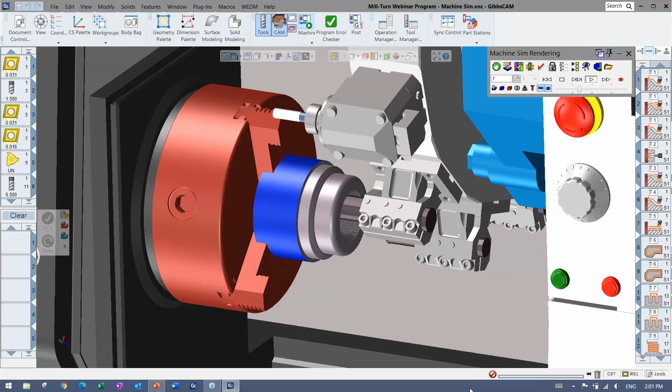I'm going to get right over to Gibbs here, and I have the part that I'm going to be demonstrating here, and you can see kind of the full setup where I have a whole machine sim, the machine's in there, fixturing, there's tool blocks, all of the tools are well defined. The purpose of this webinar is just to show off how very smooth and simple it is to go between milling and turning when you're using a machine like this that has obviously turning, but also live tooling in most situations. And in some situations, it can get even crazier than that with milling heads and lathes and stuff.

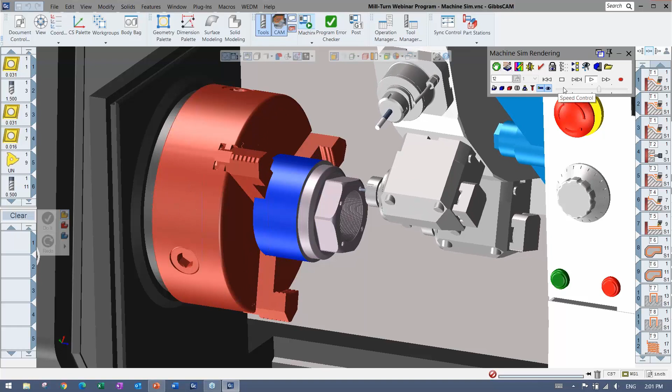So we're going to focus in on a single turret and a single spindle. And I'm going to walk through and just highlight all of the little things. I'm not going to go too much into training mode here. I just want to get the point across of how it can be used, and we can go from there. Right, so the simulation itself, I'm not going to have that in the file right away, but you can get an idea here where it's really ops on the face, the OD, anything that you would expect to see.

All right, so I'm going to open up a file. I do have files that I'm going to be loading just to keep things smooth and running on time here. So the file really doesn't have anything done to it other than I've selected the machine quickly, I've put in the stock and clearances. I've even brought in a fixture here just to show you that you can do that. Bring in a model, download it, whichever, very easy to use. And you can hide it, doesn't have to be shown at all.

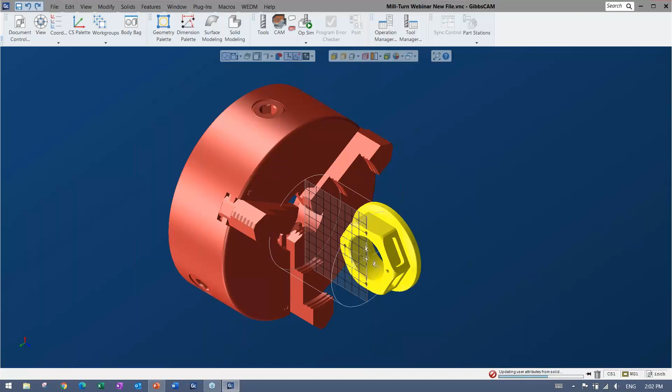All right. And I'm going to bring in a part as well. And the part, when you're cutting something, it can be a model like I'm going to bring in. So I'm just going to import my part in here, and you'll see a solid representation of it. But you can import wireframe geometry, you can draw wireframe geometry, you can dimension, modeling, all that can be done in GibbsCAM. So wherever you end up starting, you'll have something to cut in the end and to apply the actual tool paths to. Right, so you can see here everything's nicely defined.

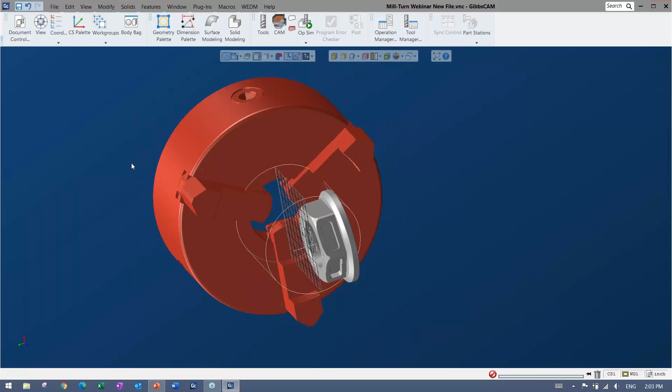Now once you have your part in here, there's lots of very good display preferences. You can hide things, show things, colors. Really the whole interface is very customizable. Anything can be moved. So I'm using the default layout. But just know that as I go through, you can change it and add shortcuts and all of that good stuff.

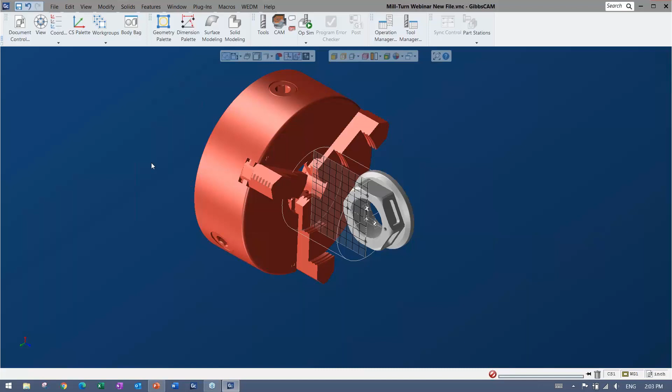Moving things around is also very simple. There's a view palette that you can use. I prefer to use shortcuts and my mouse or a space mouse. They're all available. They can all be customized so that it's the same as other softwares too, which I find is very important when you're switching between them. Okay. So first thing I'm going to do is I have this chuck here, and I'm just going to send it to this thing called the body bag. So that's a little manager for the solids, and there's different levels as well that I'll get to when I'm engraving something. All right, so all the good stuff is there, and it's very easy to access here, even on the default layout.

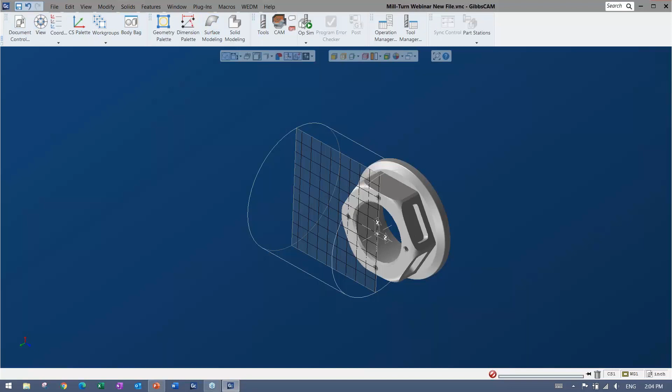Now, you can see my part didn't quite come in the proper way here, and there are plenty of tools to move things around, to locate your part, rotating, translating, all the good stuff, and some little shortcuts too. So this does come up for me, depending on how the CAD modeler has modeled things. It could possibly come in the wrong way, and I'm just going to go in and bring up the CS Palette. So these are coordinate systems, and you'll see them come up again. But basically just a machining plane, and I can go ahead and align this part to that plane. And it just takes some of the angle out of it.

Even if it was a severe angle, you could do a multiple lineup and line up to one plane and then the other, and then be ready to go and machine your part. So I'm happy with this. It looks like it's in the right orientation. There are plenty of tools to check it, but I know I'm good, so I'm going to go ahead with that.

Now, I want to cut, so I have something to cut. Now I need something to cut with. So that's when it comes into the tools. I find the workflow with Gibbs is very, very easy to understand. It doesn't really change whether you're doing turning or milling.

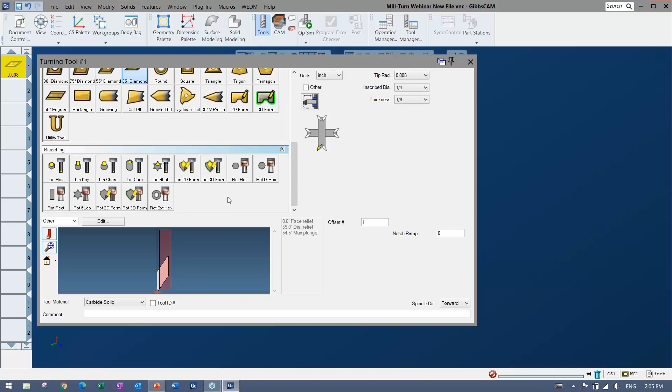You can see here that when I make a tool, first thing you do is you pick a tool form. You can see in these cases we have some milling tools here, so that would be live tooling in our situation. We have our turning tools, and we even have some broaching, some linear and some rotary broaching in there. And all of these do have a form tool equivalent, as well as the tool holders.

So you can draw, you can import a wireframe or a model and apply that as your tool shape as well. All right, once you pick something, you fill in the size, fill in the holder information, and then you give your offsets, can give a little comment, and every tool is like that. So if you're making a tool from scratch, it's very simple. It's easy to find your way around.

Now, as you get into programming, the better thing would probably be to have some way to bring in tools. So I'm going to be doing that coming up. So you can definitely load tools and all that good stuff as well. All right. Let me just pick maybe a standard insert here. Tool holder on it there. And you can see the preview is all nice and 3D as well. Boring bar.

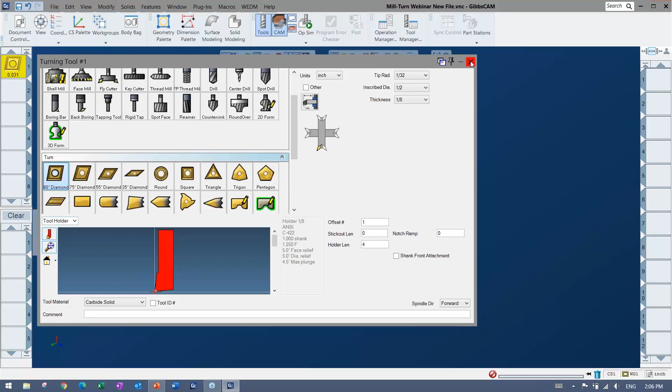So once you have a tool, whether it's a milling tool or a lathe tool, you bring it down to what's called the process list. And this is really where everything gets added together and set up before you actually make it into a toolpath. Now, depending on your license, you may or may not have everything that you see on my screen.

But this is how it works, where you either drop your tool down in here and you get access to the process types, or you can go it the other way around and double click here, select a process type, and it will filter through all the tools it thinks you can use, and you pick it, and then it all gets there in the end to a dialog that would set up whatever your toolpath process type is. All right, so whether I'm doing a contour here or roughing, threading, there's elliptical contours. I mean, there's a process for pretty much everything.

So we're going to stick to certain ones here, but if you don't see the ones that you wanted to see, then obviously you can put in a question or ask your local reseller. Now those as well are loadable. So you know, the best way to do it, I mean, you have to make your tool most likely at some point, but I actually have my tools and my processes created, again, to keep things smooth and keep things under the time limit. So you can load tools here, and there's tools that you can save yourself.

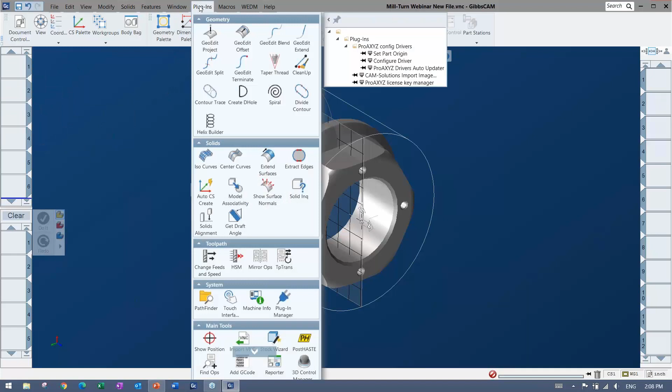You can also use different plugins, like Sandvik has CoroPlus. There's also the Helical Solutions and the Harvey Tool libraries here, and some other solutions for that as well out there. So in that case, maybe I have a process already set. You can see here I've created a folder, and it's just Mill-Turn webinar, but I'm going to go ahead and load out of that. But you can make your own folder system by machine, by material, by tool type, whatever you'd like.

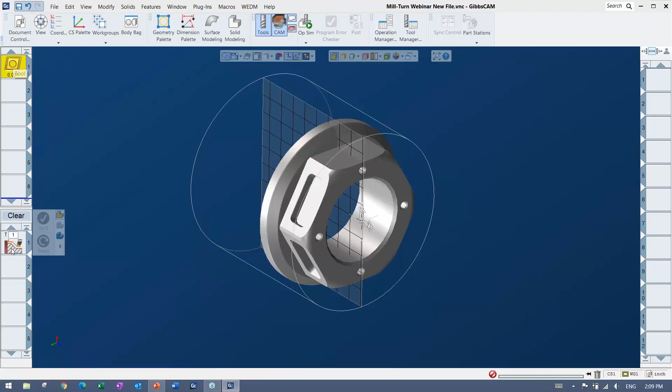And when you load it in there, then you can see if I load a tool, I get the tool. And if I load a process, I get the tool along with all of my parameters filled out already. So that could be anything from feeds and speeds to what type of process or what type of cut you want to do, right? So the one that I've imported here is the facing process. All right, so we're going to put that onto our model.

And again, the workflow is always the same. You'll see as I go through: make tool, drop tool down, pick what tool does. You get a dialog. Everything's all in that dialog. There's no hunting around trying to find different things. And once things are filled out, then you can apply the actual toolpath to the part.

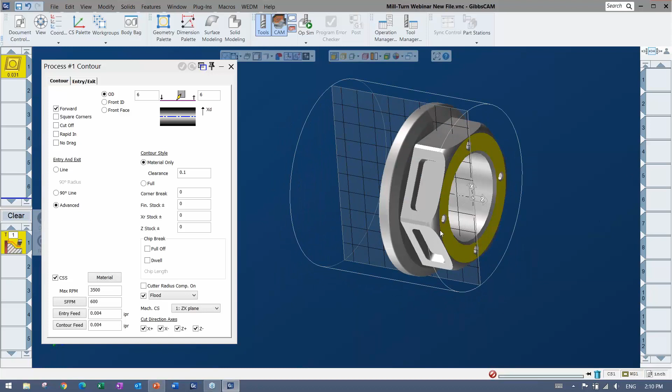So that's the place I am at right now, and depending on what process you use, there's different things to select. So I could be maybe selecting the model, or I could be selecting some wireframe geometry. I may extract some geometry from the model. If it's already drawn, I can use that. In this case, I'm going to bring up something that's used to turn on solids.

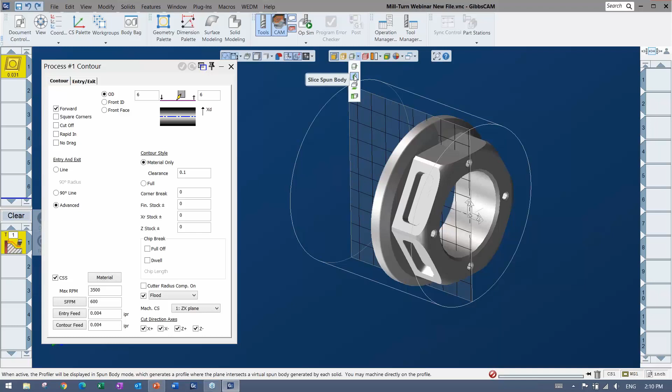That's very useful, actually. It's called the profiler, or the slice plane. And it has a certain mode. So if you see the slice plane just as it is, you can see that it slices through. And it's not really what I want to use to turn this part, because if I turn this guy, then obviously it's going to gouge in the higher areas. So what I'm going to use is I'm going to turn it to slice spun body mode.

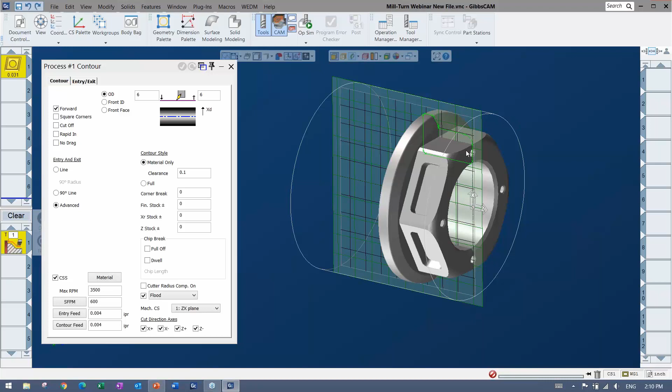And that one's really great because you can never bring that slice plane off zero, off the center, so you know your diameters are right. You can also see that it's showing all of the highest points. So it's showing all of those and getting rid of anything that you can't hit while it's turning, while the part's spinning, like these holes are not being sliced anymore.

And you can extract geometry off of that, or you can just go right in and use the profiler. All right, so that's going to be what I'm going to pick for this specific toolpath. So a contour or roughing, anything with a specific shape is usually going to need some kind of a profile like this or a model.

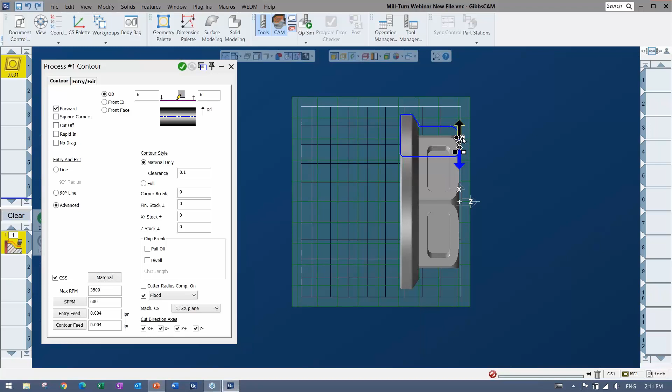Now when I'm applying, in this case, our lathe processes use these start and end markers that are quite easy to use, really. That's just about where you want to start and where you want to end and what direction you want to go. And then whether you want to go all the way around or one skim on the face, let's say, like this.

I'm ready to do the toolpath right now, but I will mention that you can move these by specific amounts and all that. You might see that come up. I'm just going to kind of place things where they are and rely on this material only to prevent any air cutting. All right, even though I drag this up here, when I do the toolpath, you'll see it avoids that.

Now, once I'm ready to make the operation, finished operation, notice my list over here, which is the operation list, is empty. So I'm going to go in, I'm either going to say do it, or anywhere I right click, there's a do it. All right, and if I click that, you can see the toolpath appears, and I have my finished operation over on the side.

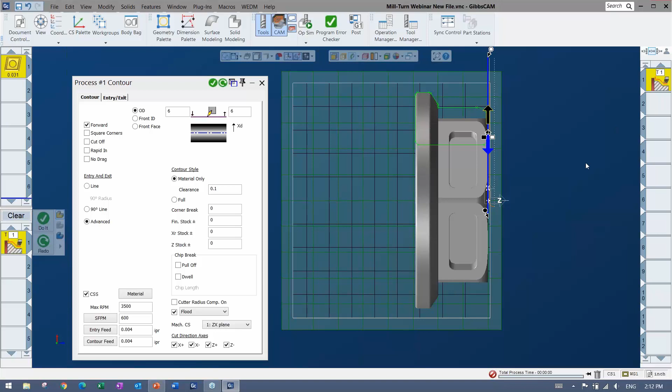Now, if I wanted to change something about this, then that's when redo comes up. Right, so there's redo, which will recalculate the toolpath based on whatever changes you made. So if I didn't want to go down as far, let's say, you can see that it shortens that guy up. But once again, it knows that there's material being removed, so even if I drag it past that center mark, it doesn't go past. I can always override that as well.

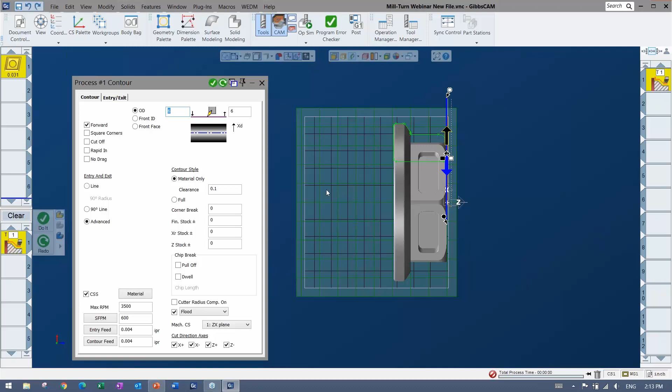So that's the gist of adding the toolpaths, and I'm not going to go into much about what each thing does, because I get into training mode sometimes. But I'm just going to clear this off, and I'm going to go ahead and check out the simulation now. Right, so we have an operation. I want to watch that.

So what I can do is come up, start my sim, and there's a couple different simulation modes. There's the one that you saw with the whole machine and everything, and then there's the one that back plots. You can rewind and play, and this one is also a nice one called OpSim, and it'll show whatever you want to play with tons of useful options. I'll bring them up as I look through the rest of the toolpaths, stopping anywhere you want, different colors, checking to see if the simulation matches the part, etc.

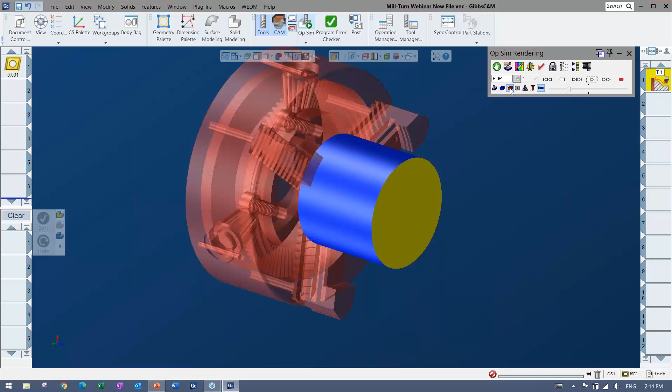All right, and you can see, even though my fixture was hidden there, it's showing in the sim, and I can always turn that off as well, or make it transparent or anything like that. You can see I have every little part in there of that fixture.

So I'll pop in, and you get to the point where by just looking at the toolpath, that's probably going to be fine. And if you see a little line going right through the part, then that's probably when it's bad. But I'm going to try not to do that.

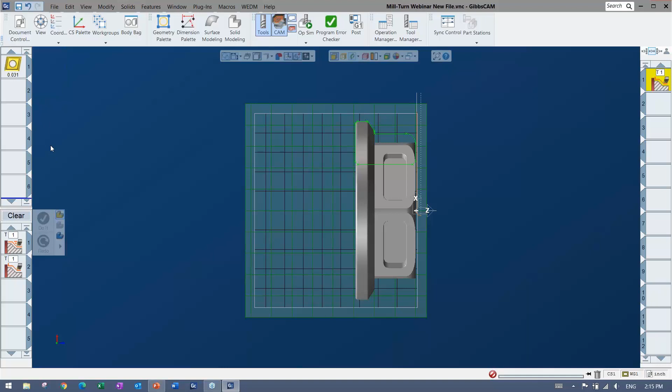All right, so I'm going to load a couple more in here, and again, not going to dwell too much on it, but here's some roughing and finishing, let's say. So you can see these are stacked together, and they'll apply to the same selection that you make. And obviously you can do roughing and finishing tools, absolutely, but here you can see that one's using the same tool and it recognized that, so it's not going to make me another tool or a duplicate tool. And this one's going to go ahead and rough this in.

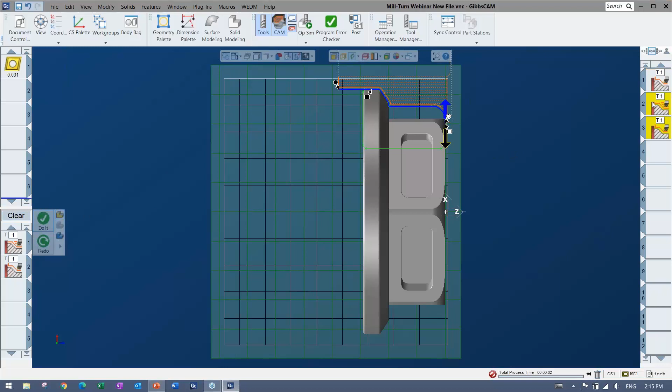All right, so I'm going to start picking things out here, and depending on what you want to rough, again, there's little shortcuts. You just do something like that, and that selects everything that I want to cut. And I can say do it, and you can see it generate the cut there. And I have 2 more operations. And again, I can pop open the simulation if I want. I can play it, and I can kind of check, is that okay? Anything crashing at all? And I actually put on this one, it's hard to see, but there's a chip breaker. I thought about using the pull-off, but again, there's lots of options in there once you start digging that you can use. But nice and easy.

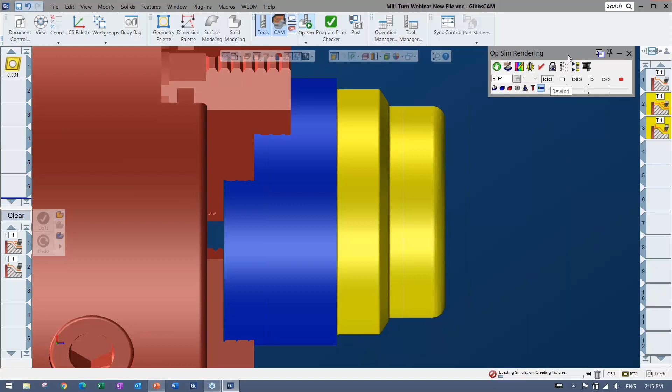I got my thing. My OD is turned. My face is turned. Again, this is a demonstration, so don't give me too much stuff about the actual methods. I might cut things differently in other situations, but let's move on to doing a little bit in the middle here. So here's an example of one process that doesn't even need anything to be selected, right?

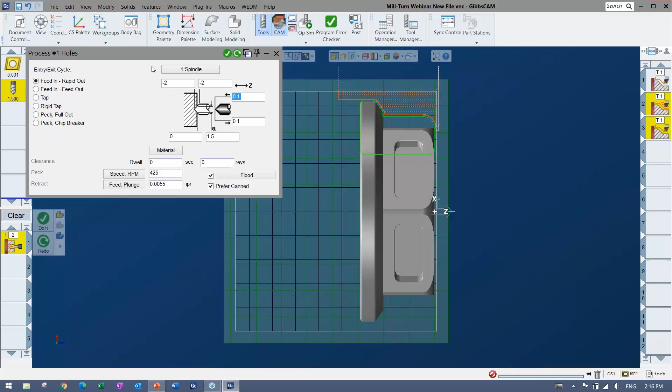So it's actually the U-drill in this case, but you can see here when I have a tool that can do both, I have a live tooling drilling, and then I have an on-center with chuck spinning drilling, right? So one's going to give me the on-center, and that one obviously can't go anywhere but on-center, so that's why I can just go ahead and say do it, and I don't actually need to select anything.

I'm going to go ahead again, maybe I'll do some rough and finish and threading. And again, these guys, if you're making them by hand, then great, but definitely save them if you can. If you use that same material, especially those same tools all the time, you can even have your whole tool list in here and possibly your whole machine sim set up before you even have any kind of thing going on, where you might have a template file that you don't even have a part in and you never change your tool locations. That's all doable, all doable.

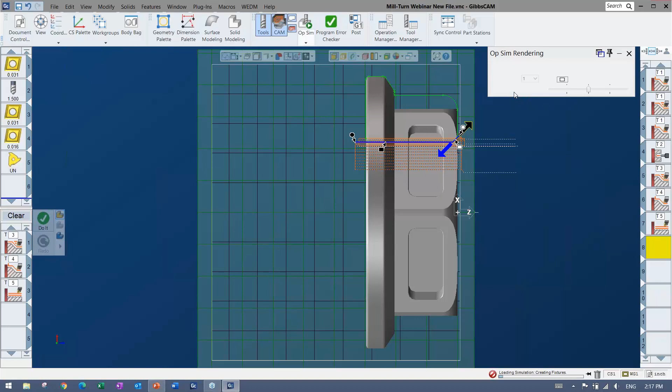And here again, you can see the material only, picking up that there's material back here. And again, if I didn't want to go back all the way, I could always redo, just kind of shore it up, and it's very quick to just redo with a redo shortcut. Again, checking all the way if you want, or doing the whole program and then checking is perfectly fine.

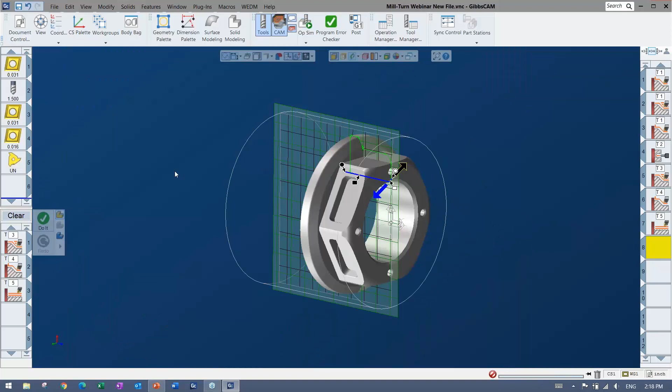But for any inner diameter work, you can see there's a little cutaway, so I can actually see what's going on inside. You can see that, yes, that's cutting, and then obviously looks like the thread's going on in there. And the transparency could also be used as well. I'll play it all a little slower when we get to the end there.

But next up, let's do some actual live tooling. So you saw that the turning was very easy to put on. It's just one plane, easy to set up. But I don't have to jump into another side of the program or anything. If I want to start milling, I can just go between milling and turning all I want. I can reorder the operations if I don't like the order that they're in. Anything like that is doable. It's very easy, and then reposting the code is very easy as well.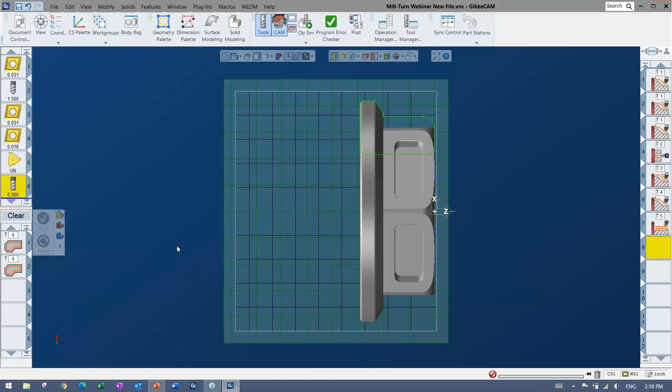So I'm going to go ahead and rough this hex out. So in this case, I'm coming in on the face. And you'll see the tool is very easy. Once again, this is now a milling tool. But again, you're just picking the form. You're putting in the dimensions. Again, offset's a big deal, obviously, and tool holder can be in there. I don't have tool holders because the machine sim tool blocks are taking care of that. But this is the main thing I wanted to bring up, where you just have a little indicator where you want to point towards.

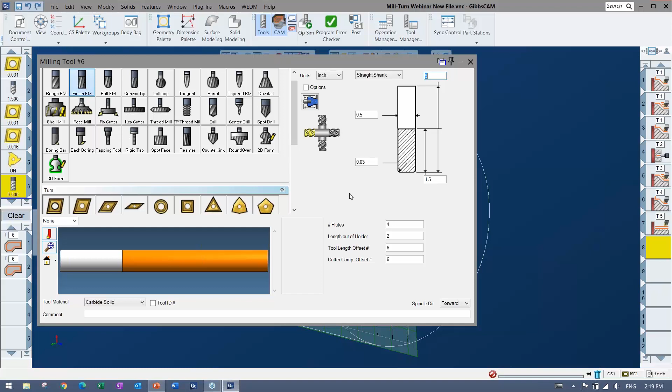These ones kind of allude to some of the more advanced machines, where you might have something like a sub spindle or a lower turret. Right, so I have this guy pointing towards the face. In my actual process setup, this particular machine—I can always make more CSs, but this one already has CSs created, and you can see this is going to be done on the XY plane instead of the ZX plane.

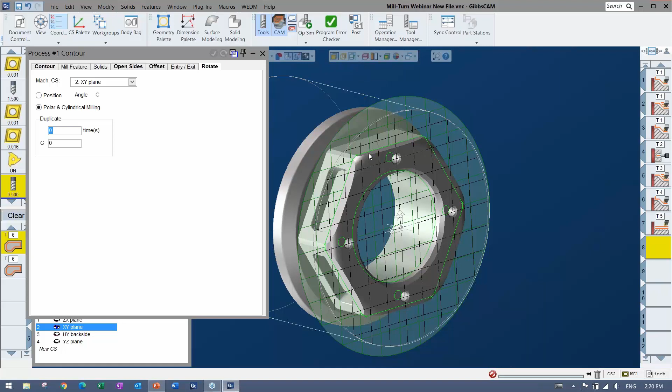So I'm going to go ahead and say, get on the XY instead, please. You can see I've also switched the mode to slice plane, so I can easily get this geometry. Maybe I'll just start here and end there kind of thing. Again, you can put them in precise amounts and all that good stuff as well.

And when I do that, you can see it's deployed processes. Again, everything I'm throwing in are paired up, but they don't have to be. If you want to separate your roughing and finishing one by one, that's fine too, or you can throw them all in there if they match, if they go together.

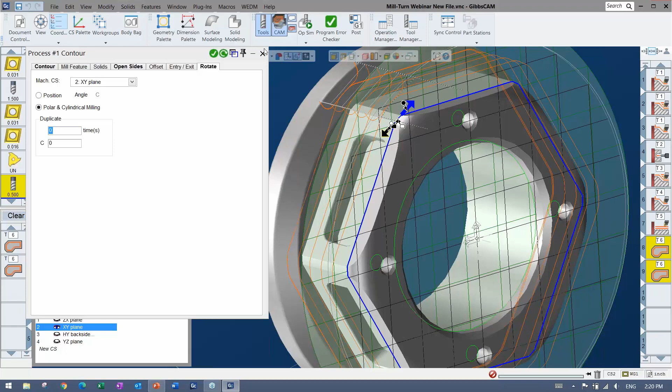Things like spot drill tap, and you never have to look up the pilot hole size anymore—it loads in with all of the right feeds and speeds and everything. So nice and easy. That guy's going to hang out there, and once again, I can come in and simulate.

This is where we have a specific option we could go between. So why don't I go ahead and skip to this operation? I could do a couple things—either select to go all the way to this operation, or buffer to this operation, or just simply play the selected operations here. I'm going to watch it.

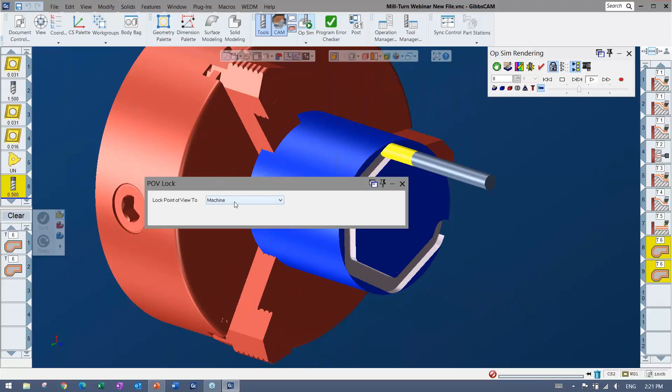This has to do with rotary milling, so this allows you to watch it as is if you want, or I could go ahead and set it so the machine is actually doing the motions it would do. Right, and you have this, which would be the C-axis interpolating, and you're doing more rotary milling or polar and cylindrical.

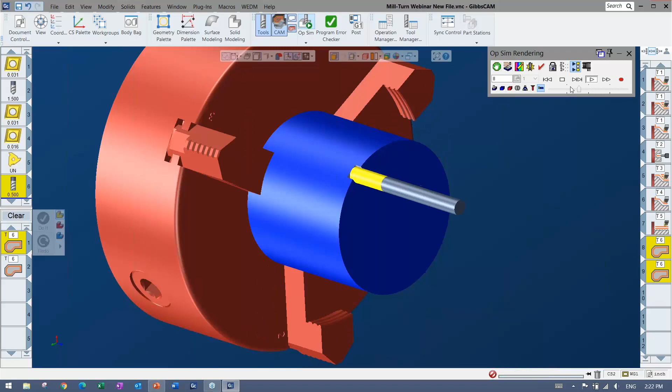Or if I wanted to change that at all, I can just come in here, and literally it's just one selection where I can set it to the position instead, so it does X, Y, Z if possible. You can say no C axis movement. Didn't have to repick anything, didn't have to do anything special other than that one option I changed. Now it's using the X, Y, and Z, and you might use one day and one the other—it depends, and if you don't have a Y-axis, it's absolutely a must.

So that hex looks good. I have the rough and finish process there, so that should be good and ready to go. We've got a couple more holes on the face here. I'm going to come in here, do a little thread milling.

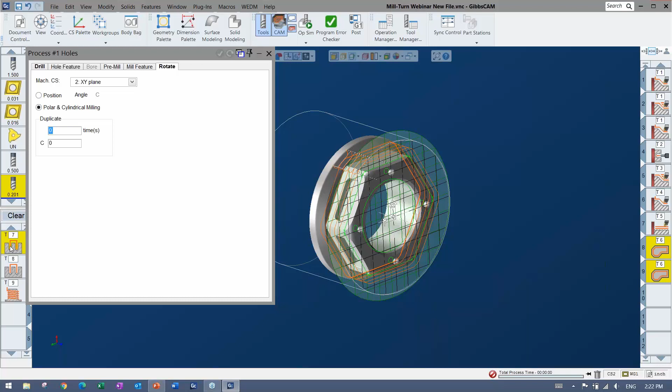Once again, just making sure we're on the XY plane. I have a drill, I have a chamfer, and I have a thread mill. I already have the profiler selecting what I need, so I'll go ahead and just grab those, do it. You can see those three went together and were already set up maybe from last time—I've just made my life a lot easier.

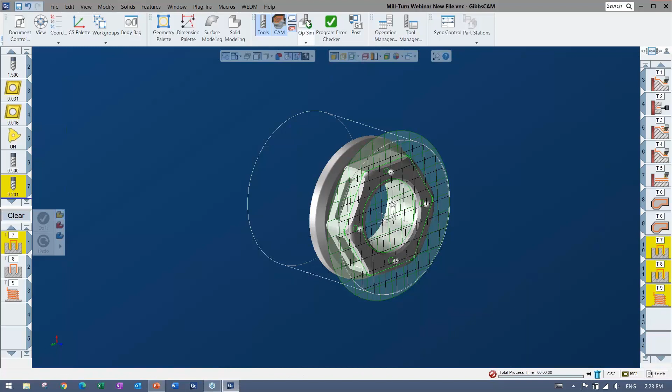Again, same kind of thing, where I'm coming in here and I can simulate and watch to see if I'd like to change anything about it. But this again would be a good one to do the polar and cylindrical, keeping that turret up in the positive here, coming in, spotting, and then you can see here the full profile thread milling, which is another thing totally supported, very easy to use.

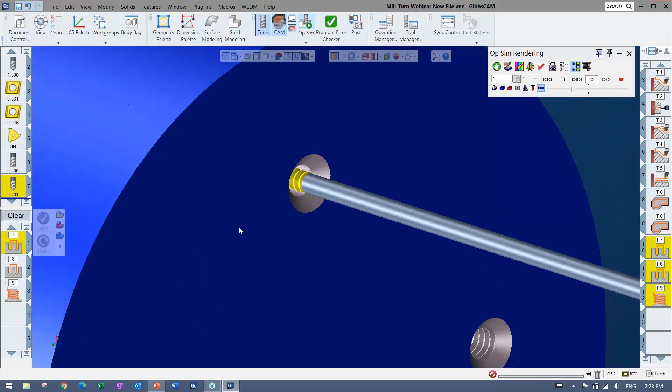Again, just making a thread mill tool, dropping it down, choosing thread milling, filling in all of the parameters—that's using the C-axis or the positional once again.

So this part's coming along. That's about all the face work I'll do on there, but obviously we could also be coming in on the OD, so I'm going to go ahead and load something for that. The first one is the pocketing on the outside. Once again, if we take a look at the tool, nothing really different about it other than it's a smaller tool, of course, but we have it sticking towards the OD now.

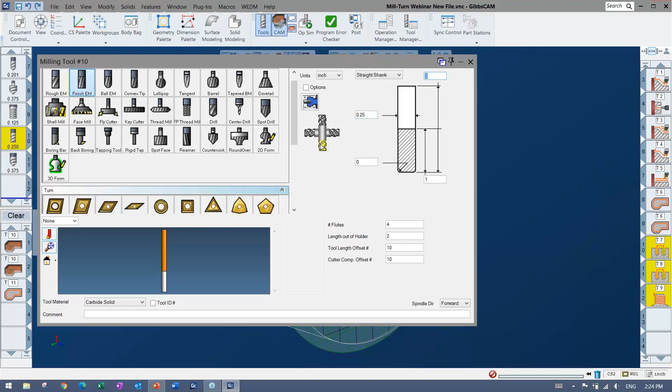The worst thing that can happen is it makes the tool path, then you simulate and see that the tool is the wrong orientation and you change it. Or a warning comes up saying the orientation couldn't be achieved. So that's not a problem at all.

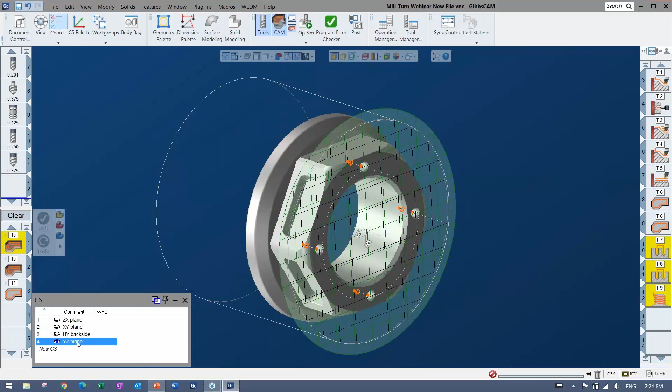Now, if I look at my planes here, I don't actually have a plane that would angle to that pocket. If I take a look at any of these, I'm either going to have to use an angle option that I'll show you in a second, or I can go ahead and make a new CS plane. It's very easy, this CS list, I'm just going to hit new CS, and maybe I'll go ahead and call it pocket here.

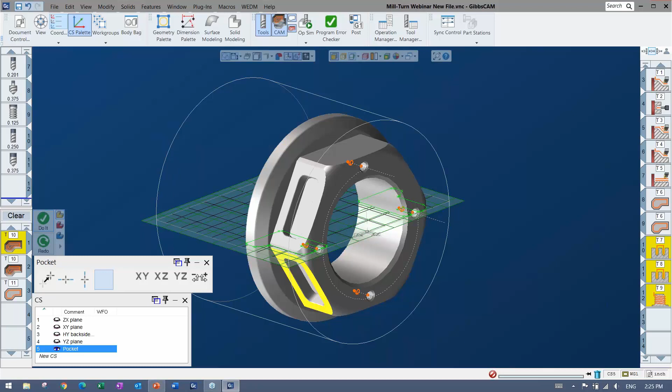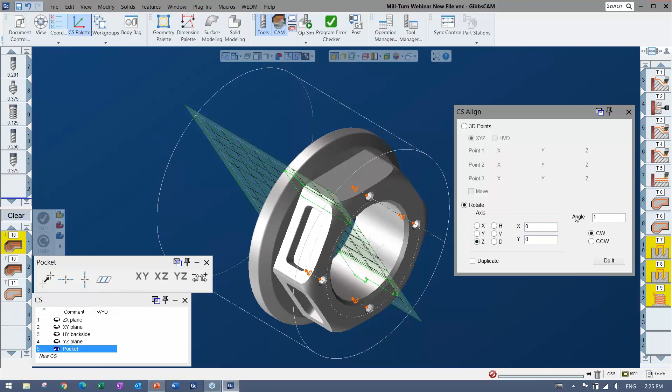I'm going to open the CS palette, which actually creates the CS or moves the CS, and I'm just going to align it there. You can see, depending on what you have, there's a negative and there's a positive, so I can always also flip. I could go to the other side, whichever works for me in that situation. I could also do a rotate, maybe a 180 rotate around. You can see all I'm doing is putting that so it's on the positive side.

I'm going to do it off the ZX plane. Let's do that one there. Pocket.

My profiler adjusts to it, so I can again reposition that to take another slice of whatever I want to cut. And then inside of my process, I can say, hey, there's my pocket CS, or whatever you want to call it, the angle it's coming in or what it's doing.

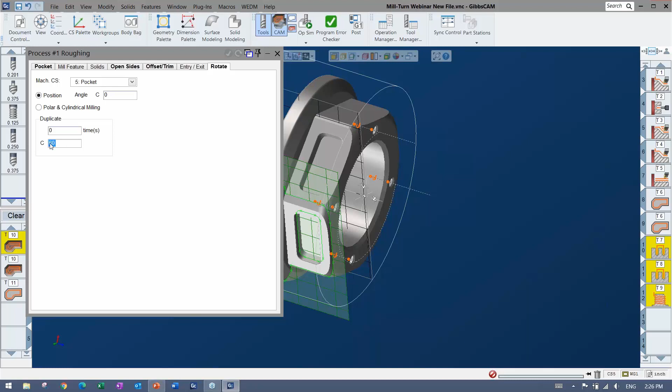Select that, and also notice that I have a duplicate here, so maybe I'll just do it without the duplicate first. Oh, and I still have a duplicate in the other one, but you'll be able to see here, I'll turn them off just to get the point across. But basically, however many times that pocket happens around this part, I can always say, hey, duplicate this same feature around however many times I want by whatever angle.

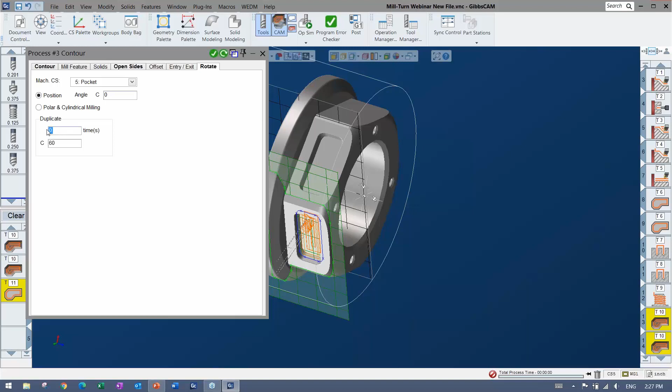It makes it really quick to create, instead of doing another CS, even though that's pretty quick too. So if I said 1 times 60 in these cases, you can see that's been duplicated and it will cut both.

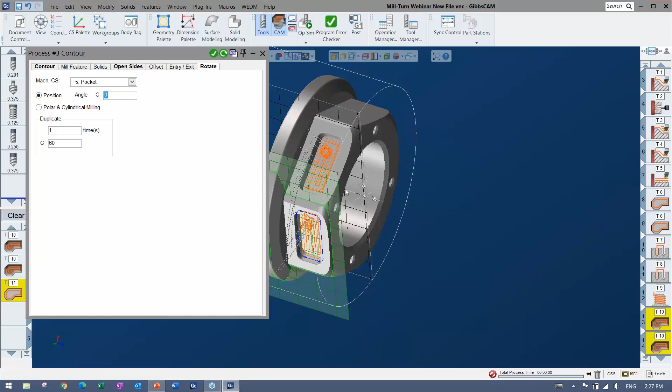Now the order depends, but you can always reorder on the op list, or I can also put specific CS angles to start from. In this case, I actually have those same pockets on this side, and those are 180 away, so it's possible I could do a 180 here and do it instead of redoing it, to create two more processes here. And I forgot the 180 in the other ones.

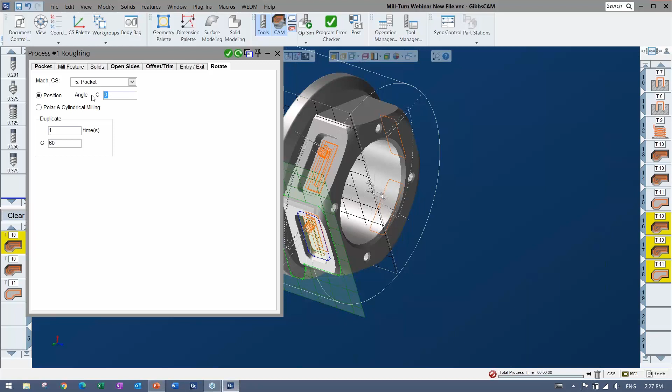So no matter what you were doing here, however many angles, if it's a weird angle, if it's not equalized all the way around, there's a chance you can get to it using this, or obviously the coordinate systems are always there and very easy to place, especially if you have a model.

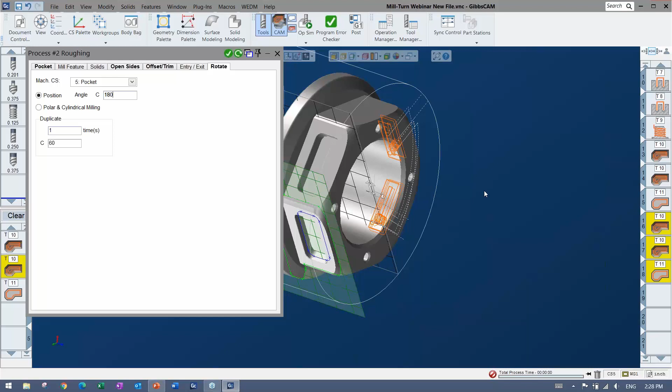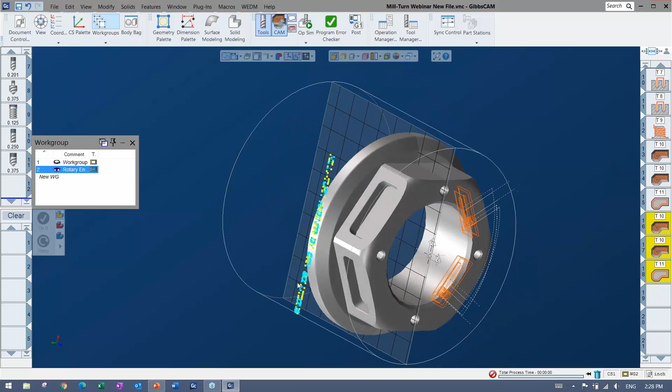Now, one of the last things I'm going to show you here is rotary milling once again, and I actually have some text in a work group here. Here's some text going along there. I'm just going to switch over to that coordinate system and basically wrap this text around because I want that to be written around with rotary milling.

It's very easy, once again it's just like doing a straight contour, but you're going to be doing a polar and cylindrical. If I load up this rotary engraving, it's a normal regular contour, but I have polar and cylindrical. And maybe I'll do that one again, 180 from there.

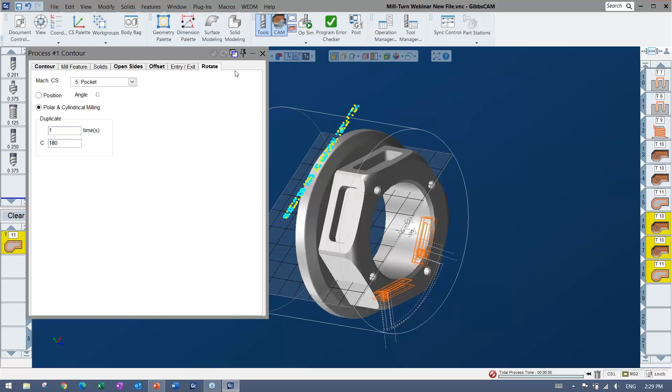And selecting, there's lots of different methods of selection. I'm going to just turn off the solid, let's say, and select like that. And say do it - that's going to write them all down and wrap them around like so.

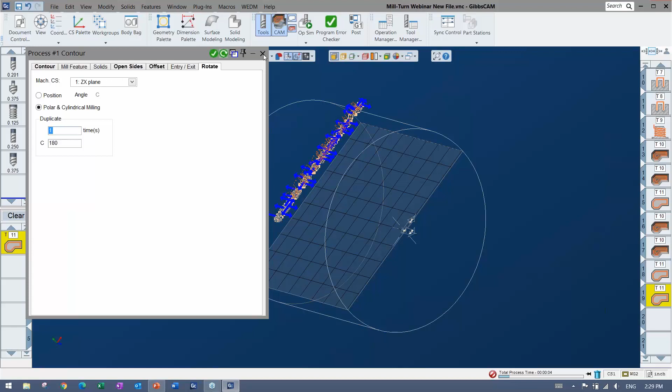So I'm going to go ahead and play out to that. Maybe I'll use this one for that. Again, I'm going to start or stop before operation 19, let's say, and I can turn that on, and that means it's just going to play as fast as I want. And then it will stop at that operation. There's also a way to buffer it in so that every time you rewind, it goes to that operation.

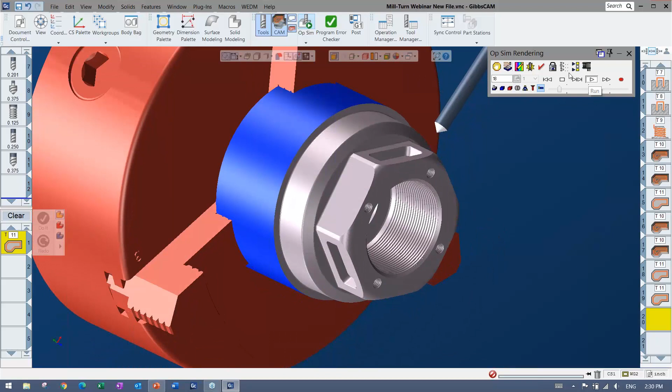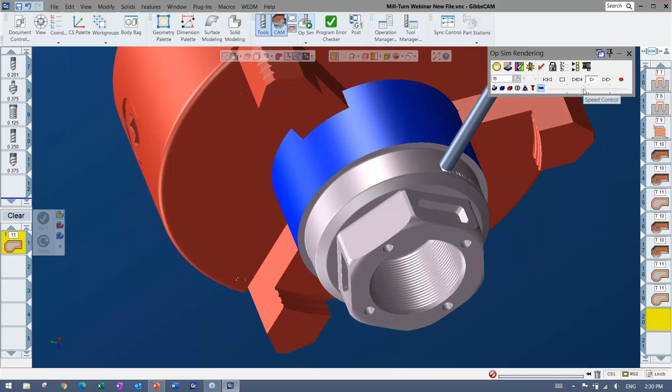Here you can see it coming around and doing some rotary engraving. There was nothing special about the text - there's a very quick text creation tool in the geometry palette. You just put it at the right radius, it doesn't even have to be wrapped - that's what polar and cylindrical does. Now it's going to go ahead and engrave around there, and because I duplicated one at 180, it's going to go ahead and cut on the other side as well.

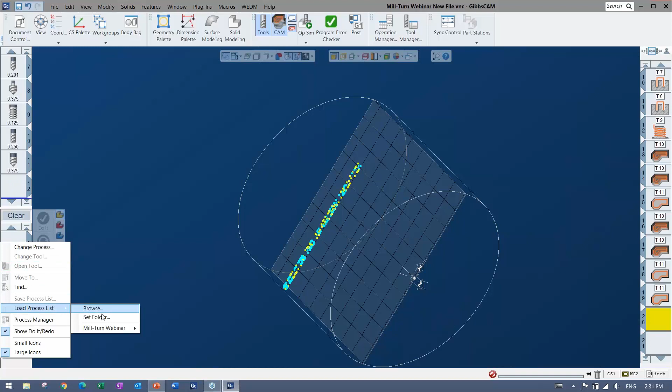Now this part's pretty much done, so all I need is the part off now. Going back to the turning, I can just make a turning tool or load a turning tool, and there's no change in where I am or what I'm doing. This one I saved with a tool holder, so that's why that came up there. But if I don't want it up there, I just throw it in the body bag and it's safe for when I need it.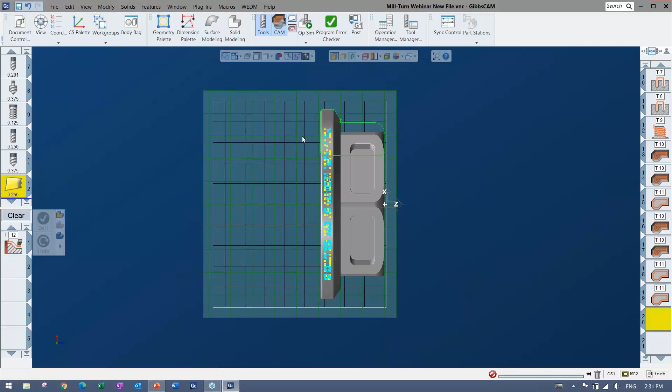Probably going to go ahead and grab my slice spun body again. I'm on the correct plane. I have a little feature here.

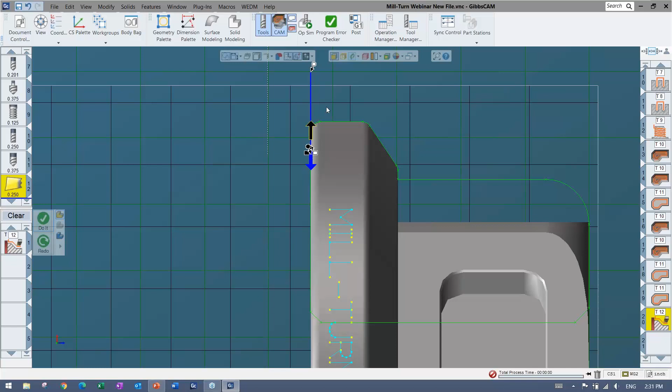You could leave material and finish up after, but maybe I'll come in, go this direction, down a little bit, make a little room for myself. And I could go ahead and maybe come in here. Different things like lead-ins, lead-outs, all that kind of stuff is totally doable. I could arc on or anything that you want there.

You can see I have some part off thrown up there, and that's essentially my program. So why don't I go ahead and watch this one, and then I'll bring up the machine sim again real quick.

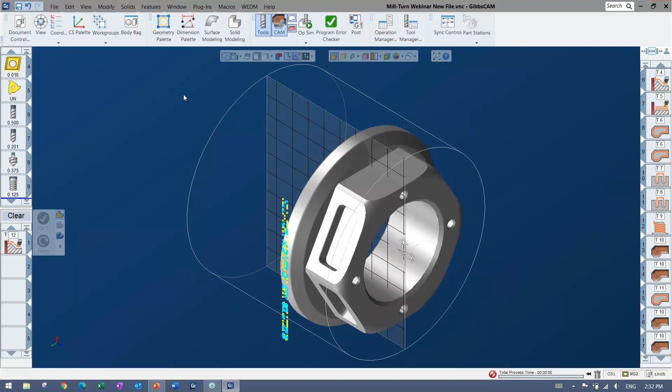Notice I didn't rewind or anything, so now it's going to just move along. Oh, my bad, yeah, I did go a little bit too far past it, it looks like. I can throw a stop there. Let's do 20.

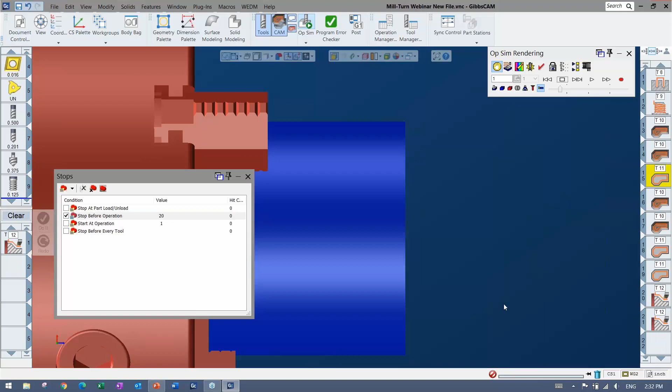I do know plenty of people that when they're programming, they are programming with all of the machine sim and tool blocks and everything there. They may have that set up. I have a lot of people I know that have a specific setup and they don't touch it after that. So that's easy to do with a template file.

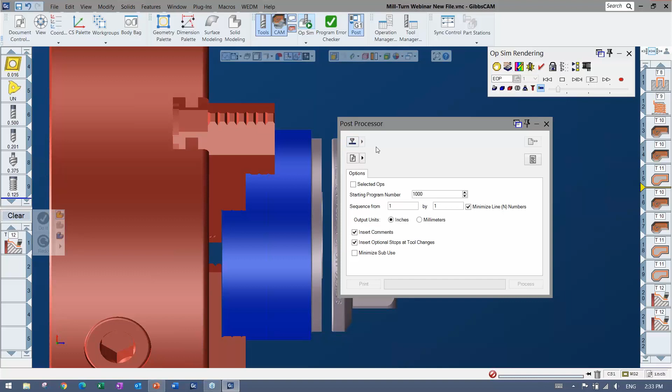Threads, parts off. Looks good. Once I'm ready, I have program error checker that I can do. There's collision checking. I can set it to tell me if something hits something else or anything like that. And then when I'm happy with the program, I can go ahead, load up a post processor and post that code. And the post processor is customized for your machine.

So there's lots of things that you can do there and different machines it can support. So why don't I bring that up again? I'll save this guy and I'll bring up the machine sim once again and just play that for a second. You're seeing a mill turn here, and this machine actually has a sub, so that's why you can see this. I'm just not using it.

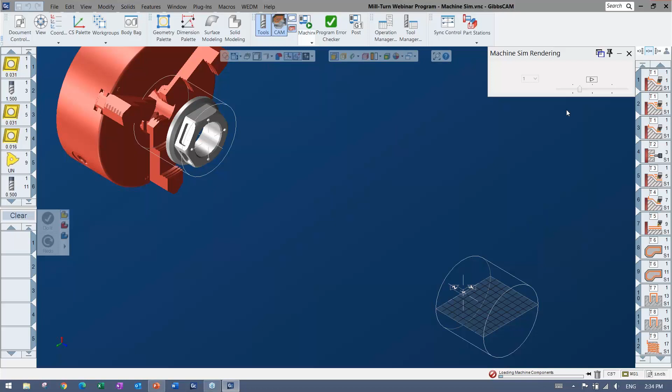But I'll bring up another machine sim there that shows you can really go up in advanced kinematics. GibbsCAM can support so many different configurations and different kinds of machines. It's all just about configuring the MDD, which is the machine side, and the post, and just getting things set so that it makes the right code every time.

And anything I can do the cutaway or anything like that, here I'll move it along a little bit. You can see the C-axis doing its thing, thread milling, and then doing the pockets. Things are pretty close. I want to make sure that those things aren't hitting. So this is a good way to do it without having to sacrifice anything or having a heart attack at the machine.

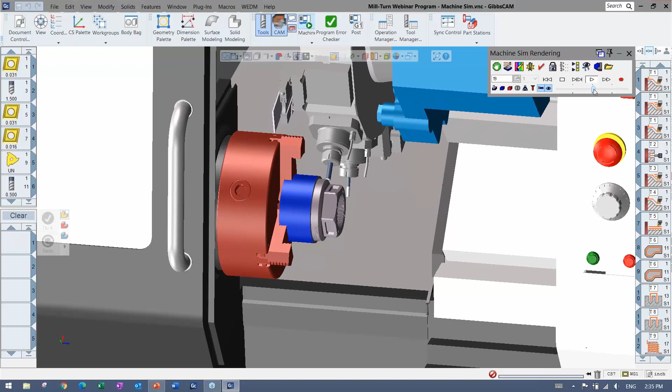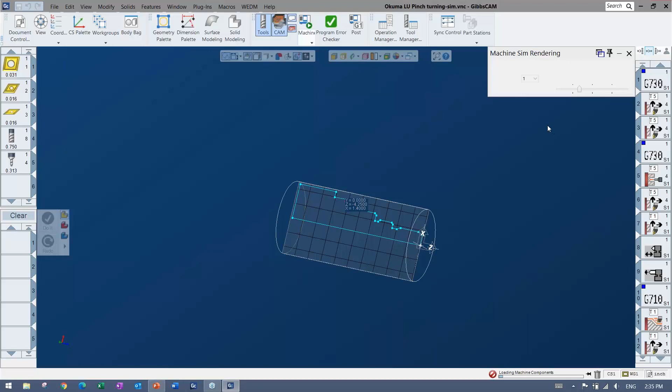There's the engraving, and then the part off. Once again, this one has a sub spindle. I'll bring up another one here that also has that. Just a couple different options you could look at. And this would be more considered MTM, so I'm sure there will be or has been some kind of a webinar or video on that online.

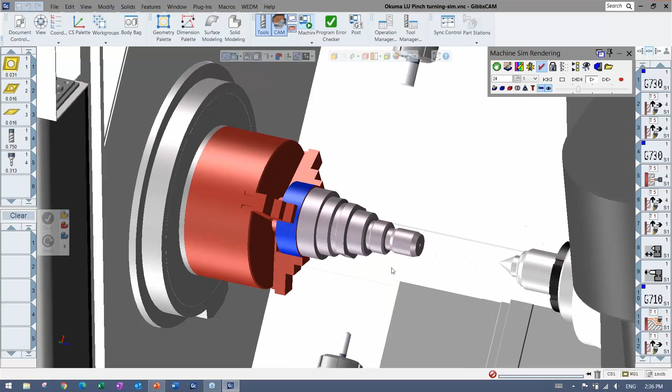But here you can see a machine with a programmable tailstock, and it's got an upper and lower turret. It's doing pinch turning. It has wait codes. Things are overlapping operations to save time. So that's all pretty much equally as easy, I would say. Everyone has to learn something, obviously, but it's all supported, postable, full machine sim once again. It's a beautiful thing.

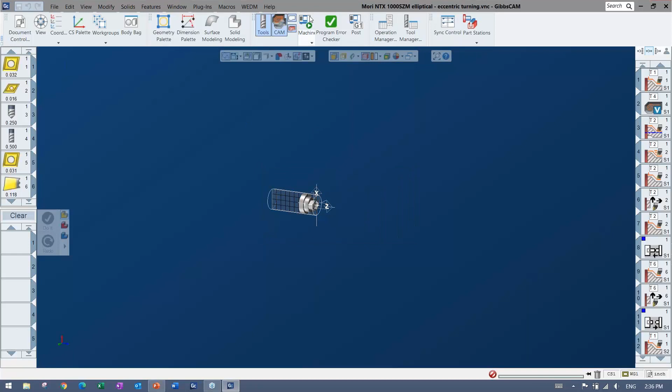All right, so that's really what I had to show you guys here. I'll end just with the B-axis. That was one that was requested here. So having a full milling head inside your lathe. So I'll bring that up and then we'll move along.

So here you can see the B-axis here that can access the two spindles. There's a sub spindle here. There's a turret there as well that can be used. Everything can be synced up. You'll see some elliptical turning here, where it's using the y-axis, it's turning a shape, not just something that's concentric.

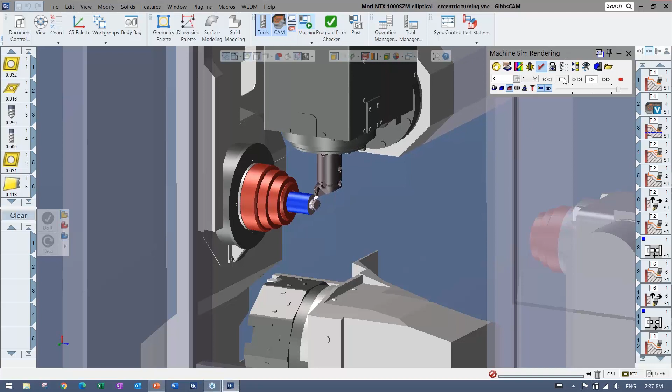And it's going to turn that. It's going to turn some more. The sub's going to come in, going to grab it, going to go over. It's going to machine on that side, and it's all fully simulatable and collision checks and everything. All right, so hopefully that looks good. Everything made sense to you guys, and I'm going to go ahead and open it up for questions now and see where we get there.

Well, hey Dylan, this is Bart. Can you hear me okay? Yes, sir. Hey, and I called you Dylan. Sorry, Brandon. Hey, that's okay.

Thanks for doing a great job showing how easy it is to program a simple mill turn part in the GibbsCAM environment. And also at the end showing how GibbsCAM can grow with your machine. So if in the future you end up getting a machine that's more involved, for example, has a B-axis head or a tailstock, you just add a module or so onto GibbsCAM and you can program those machines as well.

We do have a few questions. So what I'm going to do is I'm going to read the questions that we have, and why don't you go ahead and answer them, or we'll answer them together. The first one that I'm going to ask, I thought was a real good one, because this part looks like it could be part of a family of parts. So we have a question that says, can you automate the programming? In other words, what are the different ways we could automate programming of a part or a family of parts like this in GibbsCAM?

Yeah, I'd say, I see a lot of people copy the file and then bring the new part in and take all the operations and put them on the new part. But if you're looking for real efficiency, I'd say a family of parts macro is probably the best bet, where literally the macro is like instructions to GibbsCAM. So it can run on variables.